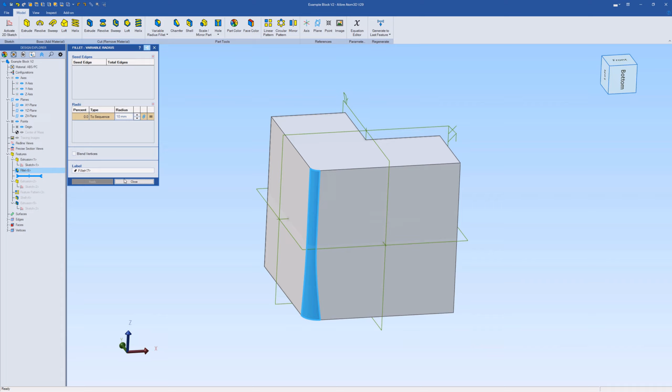So I'd generally recommend using the 3D fillet tool instead. In this case, I'm just going to reconnect the sketch, back to our basic part, and then we've got a couple of options. For example, I could use a variable radius fillet - pick this edge, and now I've got the option to set the radius differently at both ends. So one end could be 5mm, the other 10, giving a tapered fillet. I could even add additional points down the edge, say 50 for the midpoint at 5. By using the 3D tool to drive the feature independently, you get more control, and it also keeps the amount of detail in the sketch itself to a minimum. I think that tends to make modeling a bit easier.

The next tip I wanted to go through is to highlight the option for reference figures. It's very often the case that it's helpful to use some sketch work to define the position of something else, or as a reference over some other feature on the part.

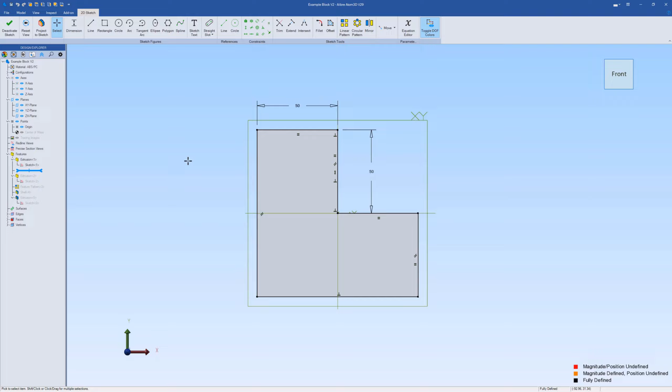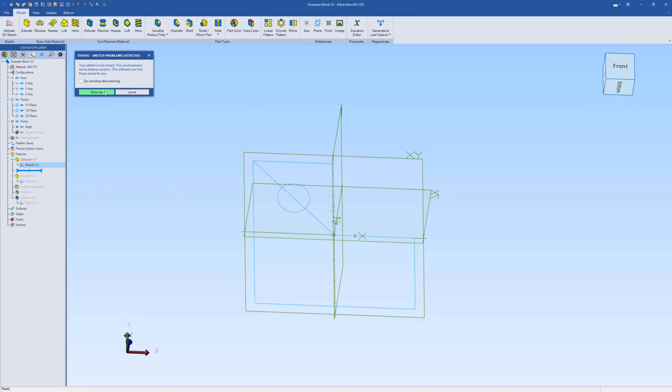For example, if I wanted to find the center of this corner here, I could draw a line across there and then use that to center a hole on that position. Unfortunately, if I come out of this sketch now using sketch figures, we're going to get an error because I've got an overlap of sketch figures, and Alibre doesn't allow that in most of its tools.

So if I edit the sketch again, I need this line here for construction, but I need it as a construction line rather than something that's being used for the 3D feature. To do that, I can just right click on this, and we've got an option here called convert to reference figure.

Reference figures in Alibre are basically Alibre's form of construction lines, and you can include them in a sketch to, for example, position something, or just use it as reference for something you're working around without them actually being involved in whatever 3D procedure you're trying to do.

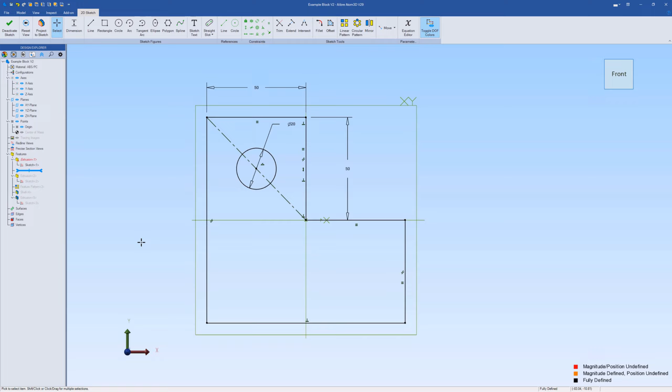If I now deactivate that sketch, you'll see there's no problem because the reference line isn't considered for the 3D geometry. If I go back into the sketch, as well as converting any type of figure to a reference line, for example we can do that with a circle, we also have a section here where we can directly create reference lines.

So if I wanted to draw another reference line down in this bottom right section, I can just draw it directly. And if I drew a reference line in and then realized I needed that to be a standard figure to be part of the 3D feature, I could just right click on it and we have the convert to regular figures option as well.

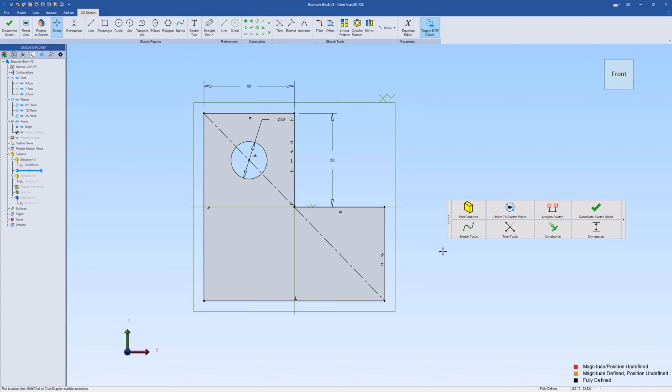So it's just something to be aware of that can be really handy when you need to include something but don't want it to be part of the 3D operation.

The final tip on sketching I wanted to run through is just a quick explanation of Alibre's constraint system. So I'm in a new part in a blank sketch, and for example I'd like to draw a pair of lines at 45 degrees.

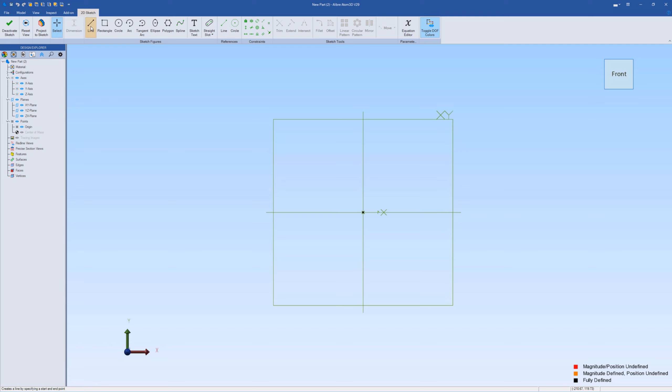If I go into my sketch figures, I can start off. I'm going to start a line on the origin point there, and I'm going to use a dimension to set that angle to 45 degrees.

Now I'm going to draw a second line in, and I would like this line to be parallel with the first one. Now I could add another 45 degree dimension, but that's a pretty inefficient way of creating a sketch.

Certainly as your sketches get bigger, you're going to start adding in more features, and having dimensions on every single line is going to get quite messy. So what we can do instead is use one of the constraints.

On the sketch toolbar, constraints are in the middle of the toolbar here, and there's a whole range of different options. These basically apply geometric conditions to lines instead of just relying on dimensions. This option here on the bottom is parallel.

If you move the mouse over any of these constraints, Alibre's got some really good tooltips that explain what it does and give a brief explanation of how to use the tool. So for this example, we can use parallel.

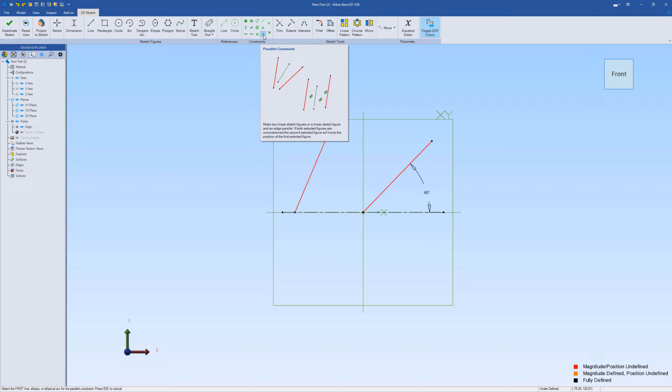If I click on that constraint, I'm going to select the 45 degree line we've created and then click on the second line we want to make parallel to it, and then I'm just going to click into empty space to unselect. So we've now made those two lines parallel.

If I now edit this dimension, the constraint will mean that the two lines work together. So the constraints are a really good way of allowing you to describe design intent, of how these figures should relate to each other without just relying on dimensions.

I'd always recommend, if you've got several things that are parallel or you've got things at the same size, to dimension once and then use the appropriate constraint to apply that to the other related figures.

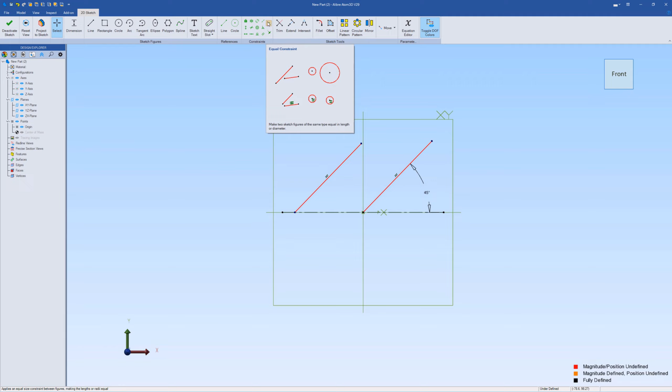So these are things you can do in here. We've got concentric if you need to center circles in each other. Equal constraint will make things either lines the same length or circles the same diameter. We have a symmetry constraint if you need to make two figures symmetric about an axis.

So there's lots of powerful options in there to allow you to simplify your sketches and capture that design intent.

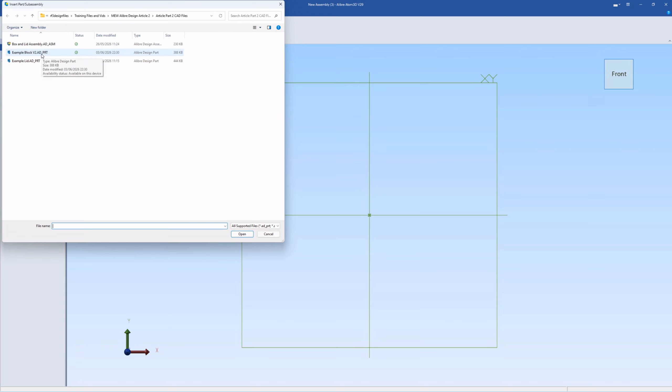For this next set of tips, I'm going to run through how to get the best out of the Alibre assembly workspace. To start with, I'm going to start a new assembly. When you open a new assembly, Alibre asks you to select a component to use to start the assembly, so I'll use the box we've been working on. I'll click OK, open, then left click to place one copy into the assembly and click finish. Let me rotate round and zoom out a bit, so there's our component in the assembly.

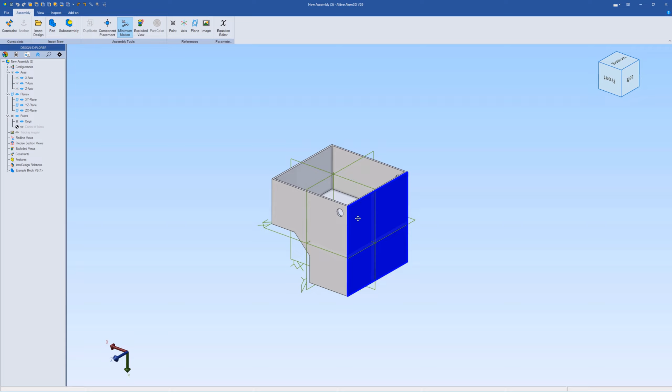Something a lot of people new to assembly modeling struggle with is the fact that you have to fix the first component in the assembly in position before adding additional components. If I left click, hold, and drag on a face of the part, you'll see that at the moment this is completely free to move in relation to the assembly coordinate system we're given. There are tutorials that suggest you can just anchor the first part. For example, if I select a face of this, I can use the anchor command and that will fix the part in whatever position it happens to be sitting in. If you're really struggling, that might be an option you could try.

However, personally, I think it's a good idea to align the first component you're bringing into the assembly with the XYZ planes you're given, so that it's actually sitting in a sensible location. Otherwise you've got this reference system with a part sitting at some arbitrary position.

So in order to position this first component, if I right click on the component here, we can turn on the reference planes - the construction planes we used in the part workspace to build the part itself. If I check that option on, you'll see the part reference planes shown in this orangey color.

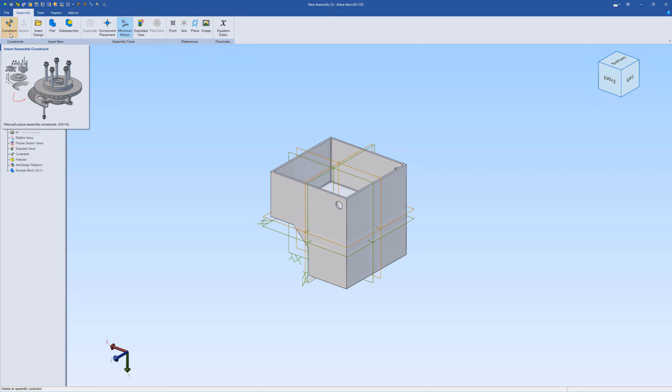Now what I can do is use the assembly constraints tool to apply constraints between the part reference planes and the assembly references, which will center this part within the assembly. If I start off here and pick the two XY planes, that creates a coincident constraint, which is fine, so I hit apply. I can then do the same with the two YZ planes, hit apply, and finally create a coincidence between the two XZ planes, hit apply and close.

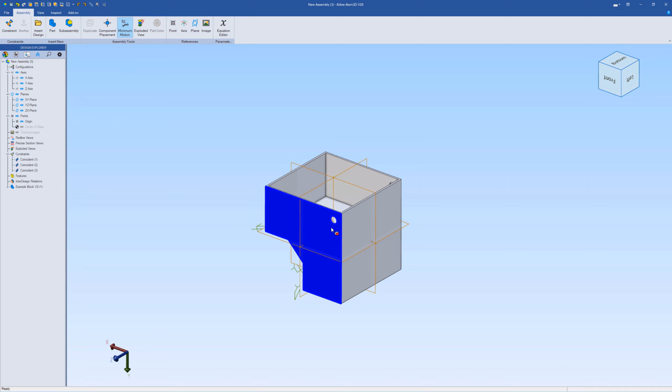If I now left click and drag on a face of the part, that will no longer move, so we've successfully constrained the first component in the assembly. At this stage, I'm just going to right click and uncheck the show reference geometry option for neatness, as if you bring multiple parts in and leave the part reference geometry on, the assembly can get quite busy.

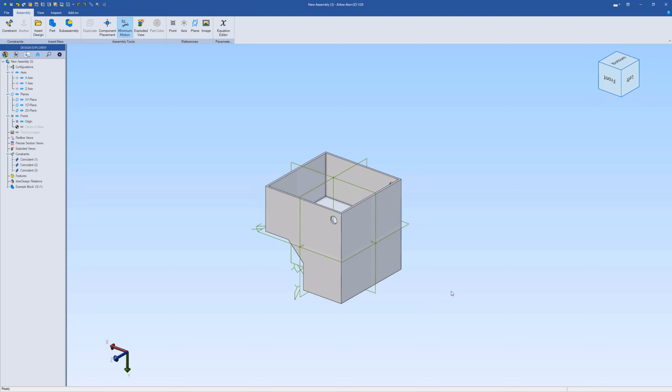The next tip I wanted to run through is how to deal with a part that you bring into an assembly that's in completely the wrong orientation for how it needs to be fitted to the rest of the assembly. For this, I'm going to go to Insert Design, and I've got a lid component here that's designed to fit this box. I'll click to place one instance of that in the assembly and then click Finish. As you can see, the lid is in completely the wrong orientation.

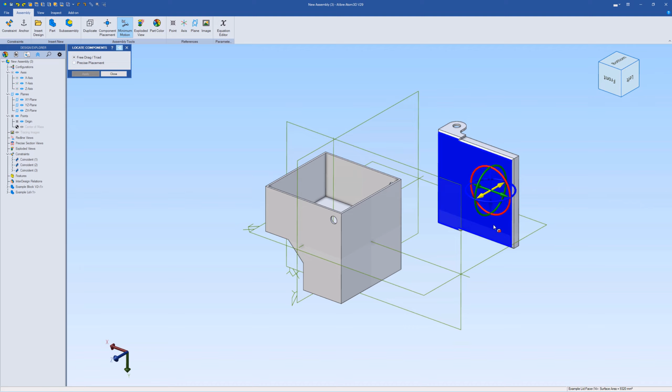One problem a lot of beginners run into is that they'll spend quite a bit of time spinning parts around and manually repositioning them to get them into the right orientation before applying any constraints. In Alibre, if you hold the shift key down and drag on a part, you can rotate it - I'll just undo that. There's also this component placement tool that, if I click on the part, gives a sort of dolly system allowing you to spin the part round.

However, as you get more comfortable with assembly constraints, you'll find that by simply applying the correct constraints to the part, it should end up in the orientation it needs to be in without you needing to reposition it. So in the case of this lid, I'm going to go into the constraints, leave it exactly where it is, and then apply the constraints I need to get this lined up.

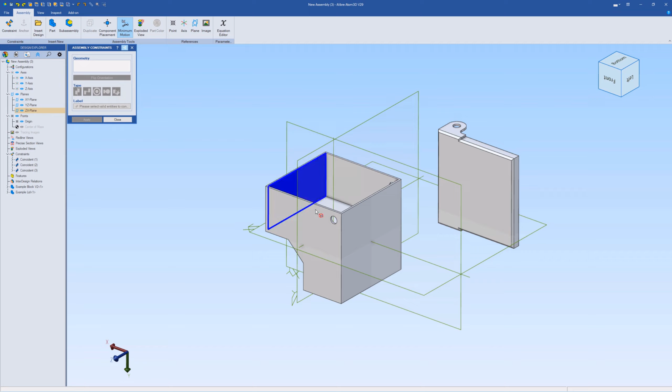The first one is that we've got this little hinge arrangement, so I'm going to pick the cylindrical face on the little hinge point on the lid. When this lid is fitted onto the part, that hinge point would line up with the hole on this side, so I'm going to pick the cylindrical face on this side of the box. Now Alibre has created a coaxial constraint, so it's lined the two holes up.

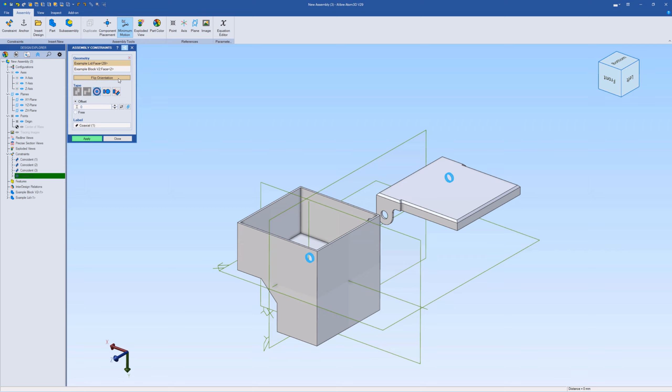However, the lid is currently sitting rotated 180 degrees from where we need it. So in the Assembly Constraints tool, we've got this flip orientation button. If I click that, sometimes you have to click it twice, there we go, that will then reverse the

orientation of that coaxial constraint and flip the lid round to the direction we need. So with that done, I'll hit apply. Now I'm just going to pick the two faces, the face on the edge of the lid and the face on the edge of the box, to line those two up. Hit apply, that's okay. So now if I click and drag on the lid with that alignment and the coaxial, the only remaining degrees of freedom is that the lid can pivot on the hinge point there.

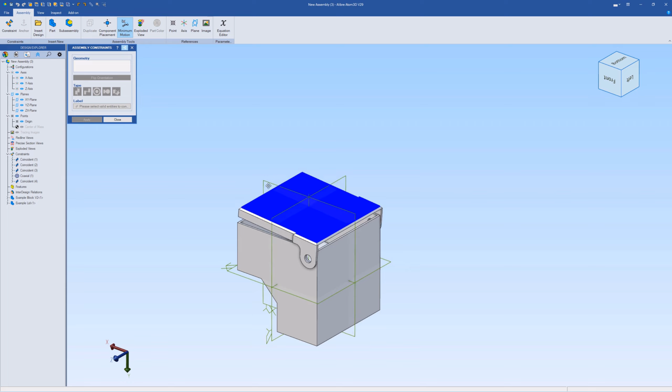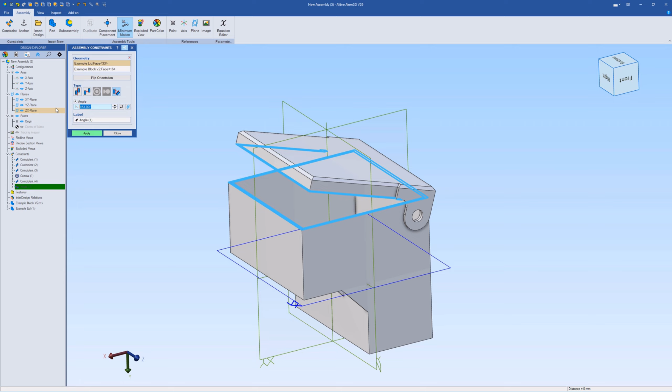So I'm just going to leave that slightly open, and then rotate round, and pick the flat face on the underside of the lid and the flat face on the top of the box. Now that's gone to a coincident, which is okay if we wanted the lid closed, but I'd actually like to be able to control the angle the lid's sitting at, so I'm going to change my constraint type to angle, and set that to say 150 degrees. I could increase or reduce the angle depending on what position I'd like to show it in, but I'm happy with that, so I'll hit apply and then close.

And so as you can see, we can quite easily bring a part in and get it fitted to the assembly in the right position simply by applying the appropriate constraints, without needing to manually reorient the part to begin with.

The final tip I'd like to run through with assemblies is something that's referred to as in-context editing. In this case, what we're talking about is the ability to edit a part that's in an assembly within the assembly itself, so that you can see what you're doing in relation to other components, rather than editing the part on its own or in a separate window.

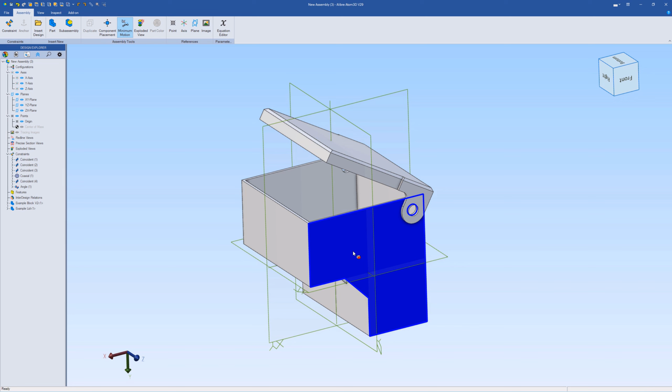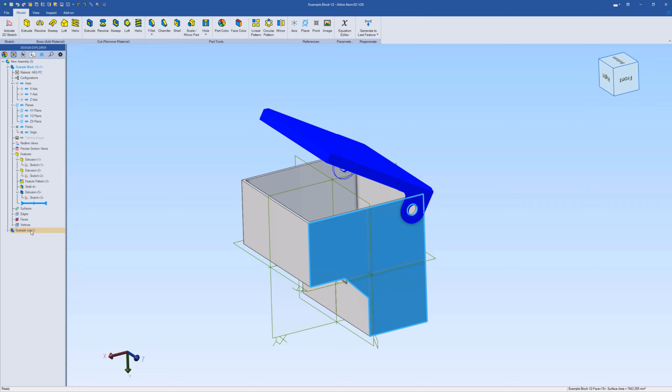So to do that, let's say we want to add some reinforcement to the side of the box around where that hinge point is. If I just right click on the face of the box, there's an option called Edit Here. If I click that, the ribbon toolbar and Design Explorer now change to the part workspace, but you'll note that we can still see the lid, and in the tree we still have the assembly listed. Basically what it shows is that the block component we're working on is shown in blue to say this is the one we're editing, whereas the lid is just nested at the bottom.

So now we can work on the part as normal. Let's say I want to put a feature on this side to reinforce it near where the hinge is. I could select that and go activate 2D sketch, and draw a sketch to create a feature.

But something else that's useful is, because we're working from within the assembly, I can actually pull references from the assembly itself. I've got a function here called project to sketch. If I go into that, this allows me to pull features from other things, either in the part itself or, in this case, from other components within the assembly. So for this, I'm just going to pick this edge of the hinge here, because it would be useful to know what size that is, so that I can make sure my support feature fits around it. And I've got a couple of options in this box to choose: I can choose whether I want to create that as just a standard sketch figure or just as a reference.

So in this case, I think reference would be more useful. There's also this checkbox for maintain association. If I was to turn maintain association on, that would actually link this feature in this sketch to the lid itself, and when you go back into the assembly, it would create what's called an InterDesign relation.

Those can be very useful if you want to drive the dimensions of one feature from another component. However, they're also quite easy to break, as if I was to change something on the lid, or remove the lid and put in a different component, that would break that relationship.

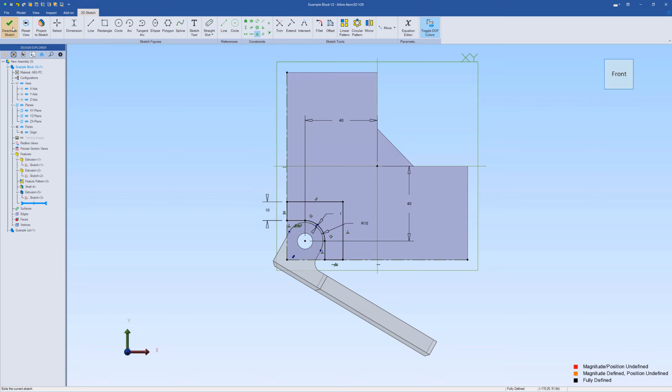There we go, that's fully defined. I'll just use that to create a little extruded support.

And as we were saying in some of the tips in the first video, rather than drawing it and extruding it to the other side, we can just cheat and use mirror to copy that to the other side of the part.

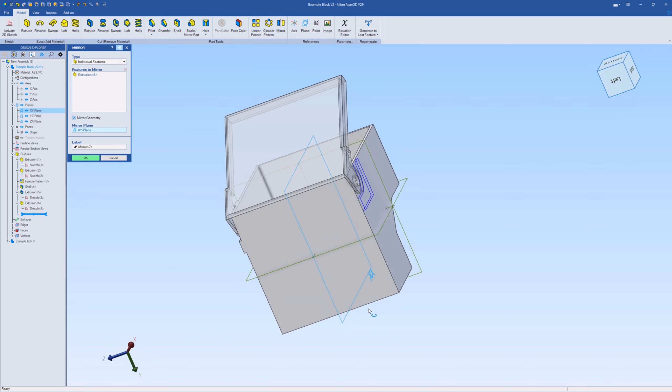Now I'm happy that we've got our feature, so I'd like to go back to the assembly environment. To do that, I'm just going to right click on where the blue part name is in the tree on the left and uncheck edit part subassembly. Now you see that our toolbars go back to the assembly workspace.

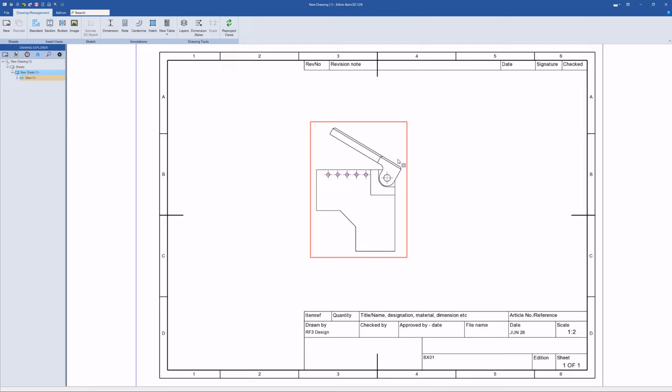So for example, if I needed the center for the radius there, the auto hole center function doesn't provide that. So I'm just going to click minus to remove the centers.

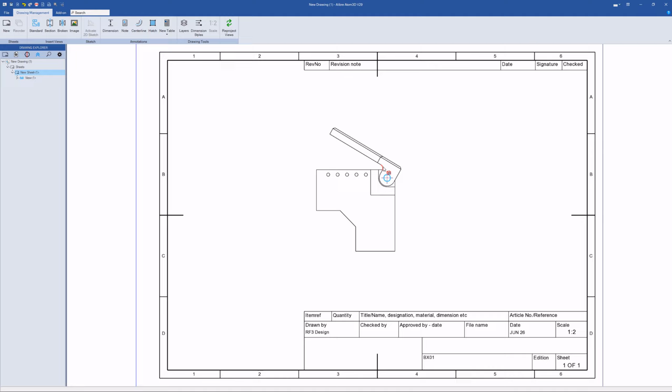So if I want to add a center to a specific hole or to an arc, all you need to do is move your mouse over the edge of this circular figure you want to add a center to, right click and go insert center. And similarly that also works for arcs and radiuses as well.

So I can add one in there, and say I wanted to just dimension one of these holes. That's just a useful little tool - it allows you to selectively add centers to the drawing rather than adding centers to absolutely everything or none at all.

The next thing I wanted to run through is the activate sketch in view capability, which can be quite useful. There are times when modeling where there's a detail on a part, like a logo or surface texture, that isn't practical to model in the 3D workspace. In those cases it's useful to be able to draw over the top of a drawing view to add additional information.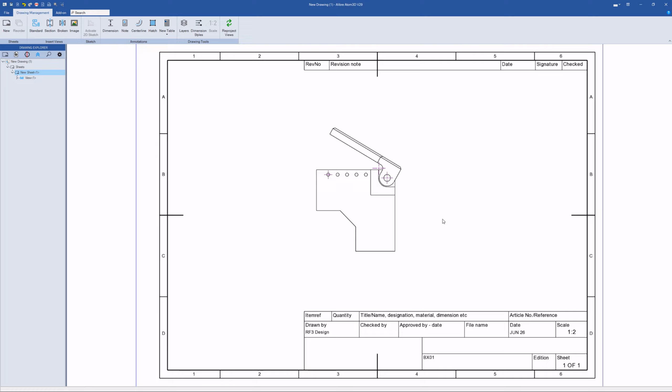To do that, move the mouse over the view you want to edit, right click, and go to activate sketch in view. This brings up the full set of drawing tools, similar to the tools available in the part modeling workspace, and from here I can use these to draw on top of the view manually.

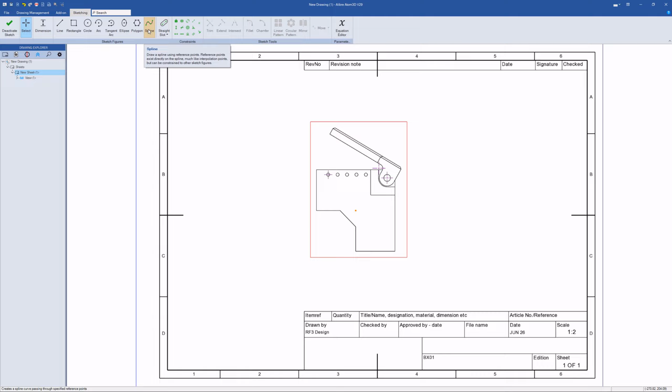For example, using a spline here, I could indicate that there's a logo or something like that there—whatever I want to draw.

When I'm happy with the changes I've made, I can just deactivate the sketch. Now if I move this around, you'll see that because I was sketching on this view, it stays linked to the view itself and moves with it.

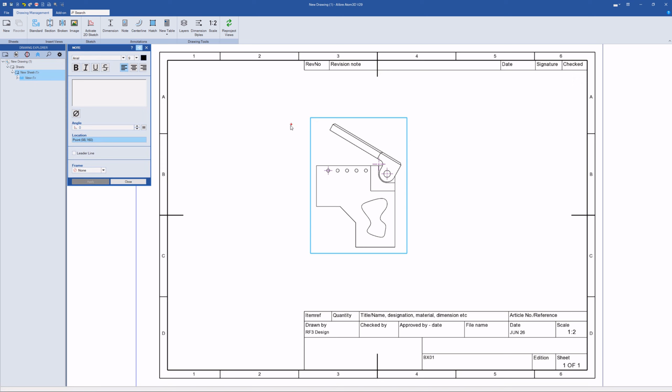Then I could, for example, use the note tool and show a leader to say 'logo here' or something like that. So it's a useful way of being able to edit views.

It's also possible, if I don't select the view and just click on some empty space, to go activate sketch on sheet. That brings me back into the part tools, but sketching just on the page itself.

This can be useful. If you import an AutoCAD DWG or DXF file into Alibre, it will open it in the drawing workspace, and using the sketch on sheet function, you can work on a 2D drawing and edit it. So it's actually possible to use Alibre Atom or any of the versions of Alibre as a basic AutoCAD drawing editor if you need to.

Click deactivate sketch, and if you were doing that, you do have dimension styles and layers options in here, so you can control the line work styles and whatnot.

Now the final thing I wanted to run through is what to do if I want to make a change to the part and then update the drawing. Alibre doesn't update the drawings all the time—it will reproject all the views when you open the drawing. So commonly you're working on the parts, and then when you're finished, you open the drawings up and make some updates.

However, if you're working on something and notice something that needs to change, it's sometimes useful to jump into the 3D model, make a change, and then see what happens on the drawing without having to close and reopen everything. So it is possible to do that.

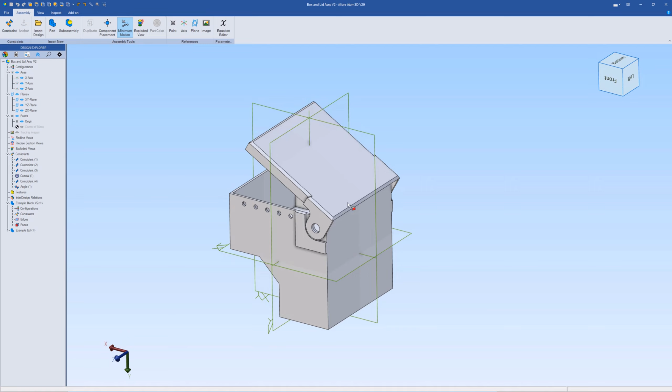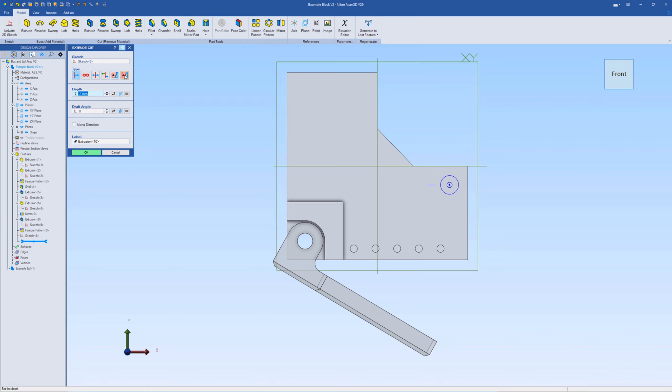As an example, I'm just going to jump into the 3D model and edit this box here. I'm going to add an additional hole to it—just stick something down there. So I'm happy with that sketch. I'm just going to make that a through all hole. So now I've got a hole in here.

Now the first thing is, before I can update the drawing, I need to save the change to the part within the assembly. So I'm just going to come out of the assembly mode and save. That's going to update the part.

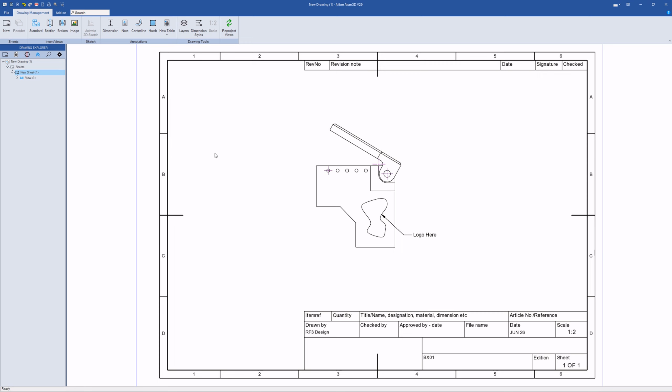And then I'm going to close that and go back to my drawing. As you can see, the drawing hasn't updated yet. That's where this reproject views option comes in, but before we can do that, we need to save the drawing. So I'm just going to go up and hit save.

Save my drawing there into my folder. Now I'm going to hit the reproject view option and then just go OK. What that's going to do is force Alibre to reassess the drawing, and then you can see it's updated and brought through the new hole feature we added to the assembly.